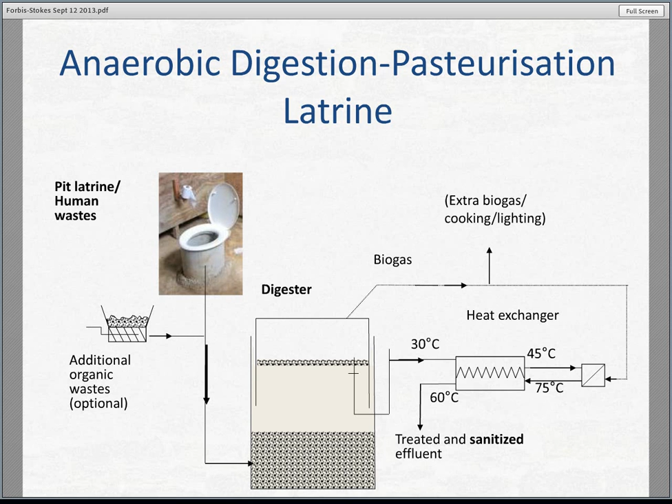What comes out after the final pass through the heat exchanger is an effluent that we hope has no pathogens. We also hope to produce extra biogas that you can use for cooking, lighting, or any other energy needs the home or community has. The system has no moving parts—it's all gravity flow, so it's very simple, and we hope to have very little maintenance for the system.

So the objectives for our project: we started off wanting to prove the concept. We did over a year of operation in our lab here at Duke. We wanted to see if the digester could operate well under high strength conditions of just urine and feces, and make sure that our heating system would remove pathogens.

We did test for pathogens with E. coli and used simulant urine and feces for the digester. Since March, we've had very steady conditions and are pleased with our process.

So we have moved into the pilot study phase of the project. We started building in Kenya in May, working in Eldoret with the University of Eldoret. We built 3 systems, each one serving approximately 25 people. That project's ongoing, and we'll continue monitoring digester operation as well as the heating system like we did in our lab at Duke. For the future, we want to assess strengths and weaknesses of the project that we can improve on and continue to use, and see about feasibility for scale-up.

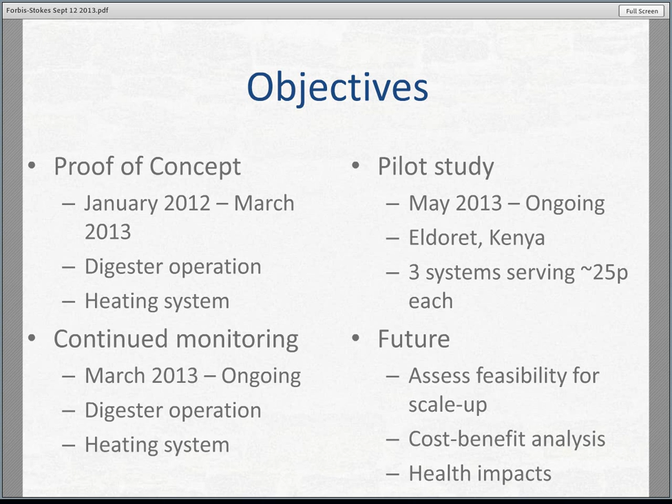Also associated cost-benefit analysis: the extra biogas has a pretty significant value in the community in Kenya, since burning fuels are very expensive. And the final effluent is high in nitrogen, which makes it a very valuable fertilizer, which is pretty expensive for the local residents. We also, in future studies, want to monitor some health impacts from our system.

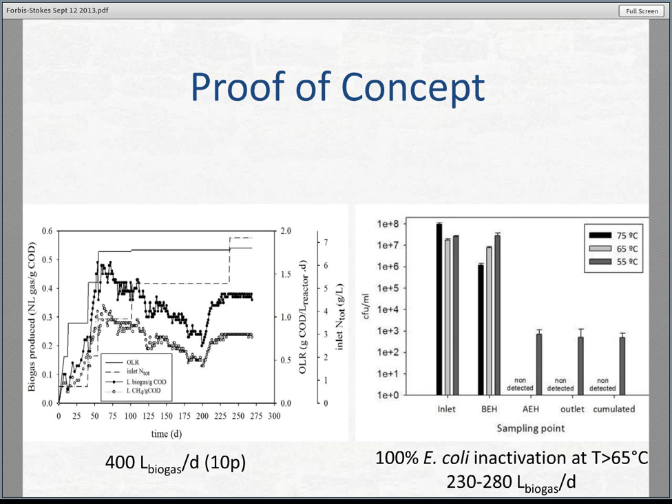On the right side, using that same system design, here's some results from our heating. Operating our heating tank at temperatures greater than 65 Celsius, we had 100% E. coli inactivation. To operate the heating tank at this level, we needed about 230 to 280 liters of biogas per day. So we found that we will have, or we expect to have, excess biogas from the digester.

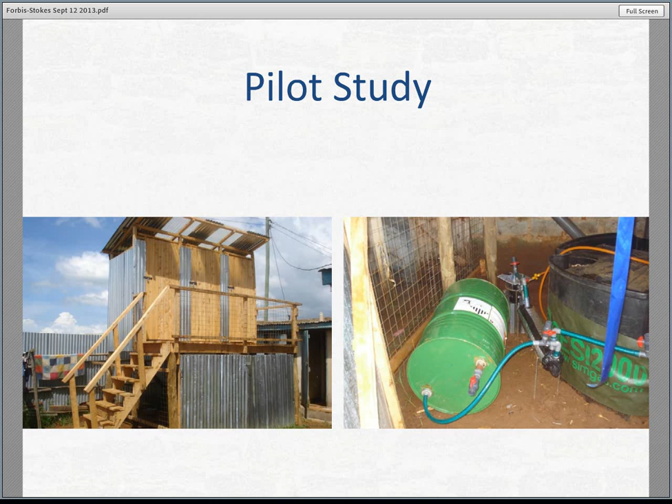Welcome, Dorothy. I had a little question about the three systems for 25 persons per system. Is that one toilet, or is it several toilets for each system? So each toilet or each system is what you saw in that final picture with the 3 latrines above connected to the digester system below. This left picture, we built 3 of those. The way the residences are set up in this community, you have kind of an 1/8 of an acre plot with about 25 residents on each, so we built this system on that plot, and all the residents of that plot share that one system. There are 3 different plots where we built these.

Just one other question: water content is so important in biogas production, and I'm just wondering how you managed to regulate that.

In the lab, we haven't regulated per se. The only thing coming into the digester is our simulant urine and simulant feces, based on what we'd expect: about 1 liter per person per day of urine, and 400 grams of feces per day per person. That's all that has come into the digester.

We did do a phased up-loading period where we had a higher concentration of water versus feces and urine. But once we got to about day 75, we stopped doing that and have been operating with only urine and feces coming in.

Any questions from the group that's connected? Okay, I guess we'll... Aaron, sorry?

I was going to ask Aaron, how fast is the digestion? The one in the lab we designed for a 40-day retention time.

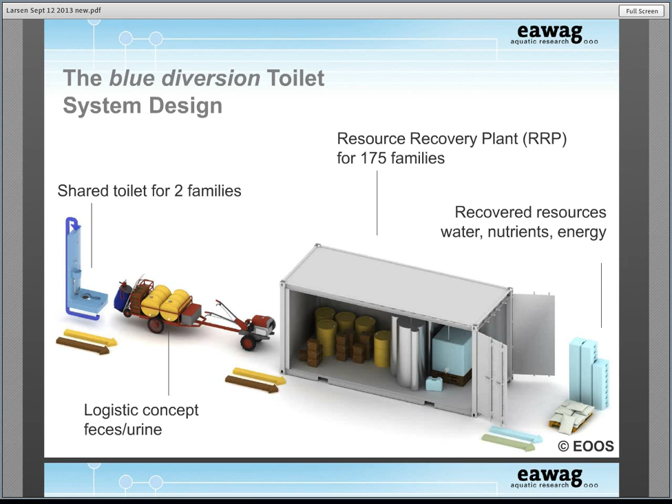We chose to develop a shared toilet for 2 families and recover the resources at a larger scale, for about 175 families. The toilet is a urine diverting dry toilet. Because of this change of scale, we need a logistic concept for transporting dry feces and undiluted urine to the resource recovery plants.

From the urine, fertilizer is recovered, at the expense of energy generated from feces. In this presentation, I'll concentrate on the toilet.

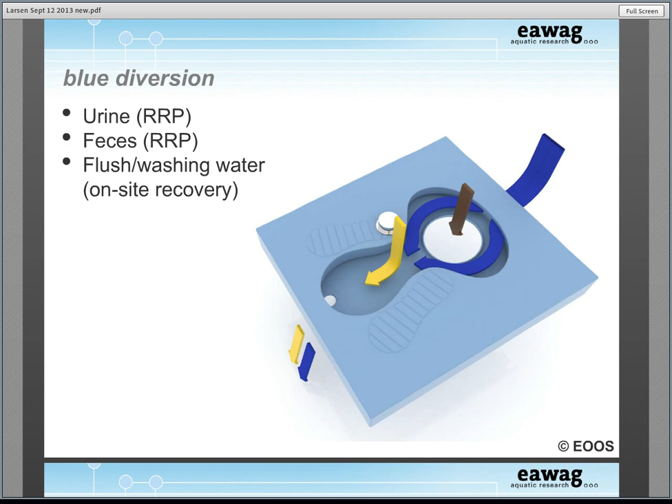It's a urine diverting dry toilet as we know them, but in order to increase hygiene and comfort, this toilet can be flushed, and urine and the flush water are not mixed — they're separated by a technical device which the user cannot see. The water can also be used for hand washing and anal cleansing. It's recovered on site.

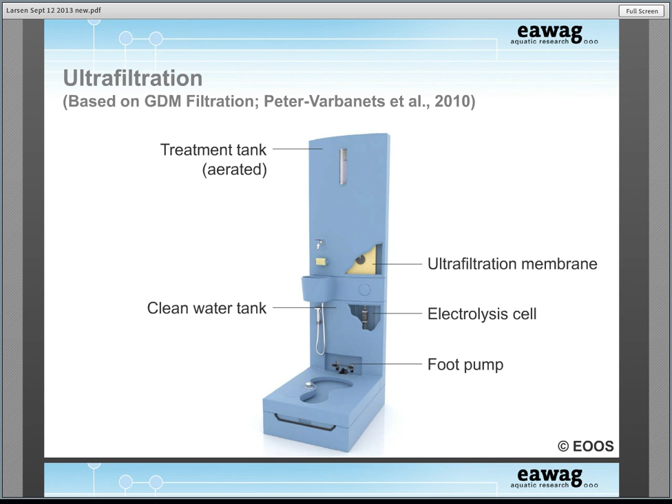In the water wall of the toilet there's an ultrafiltration treatment tank, but it functions exclusively by gravity. It's based on the gravity-driven membrane filtration developed at EAWAG for drinking water production. The polluted water is pumped up with a foot pump by the user, and the ultrafiltration membrane is kept open by higher organisms grazing on it, so one doesn't have to maintain it.

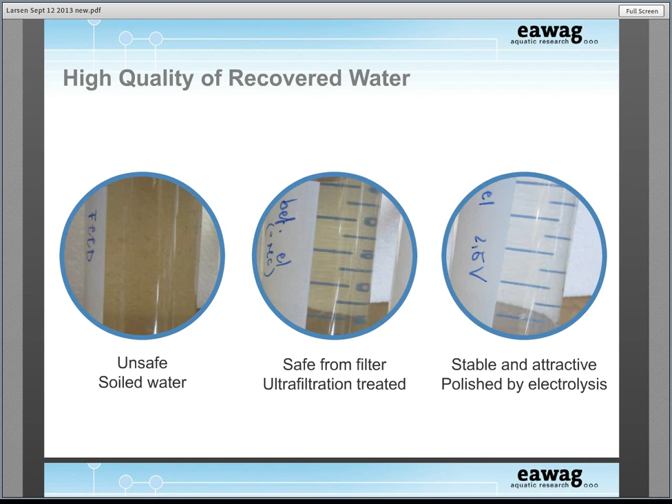The water comes out safe from the ultrafiltration membrane — without bacteria, without virus — but as you see, the water is slightly soiled, slightly colored. We remove this color with electrolysis, and at the same time remove traces of organic matter and produce chlorine for disinfection.

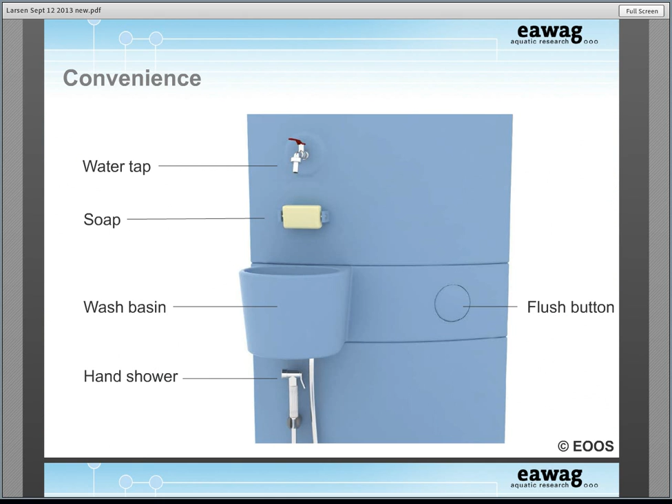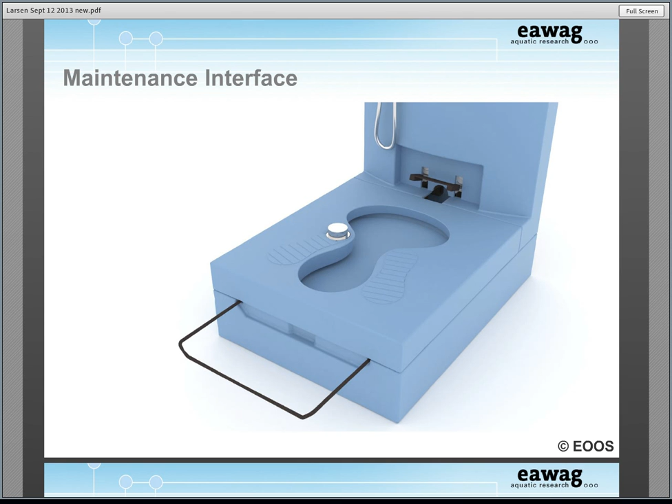The toilet was designed by Harald Gründl and his collaborators at EOOS, but very early in the process we went to Uganda, to Kampala, and talked to potential users about whether they liked the design language. They liked that, and they also liked the convenience — the water tap, etc. Especially the washers liked the hand shower, and they liked the flush button.

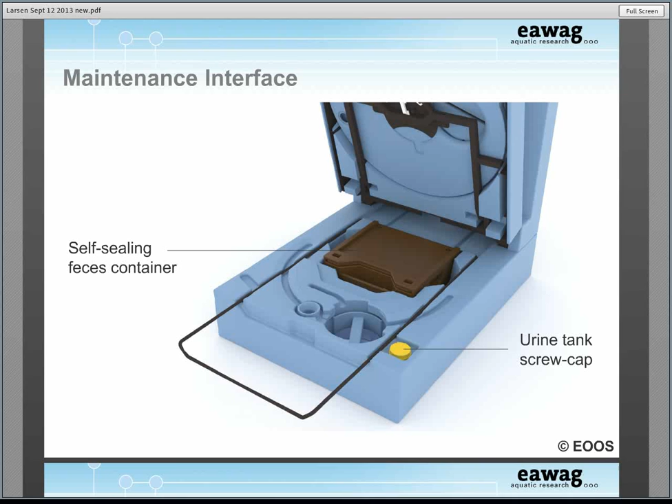The maintenance interface is very important in order to ensure that the people collecting the urine and feces twice a week will not get sick.

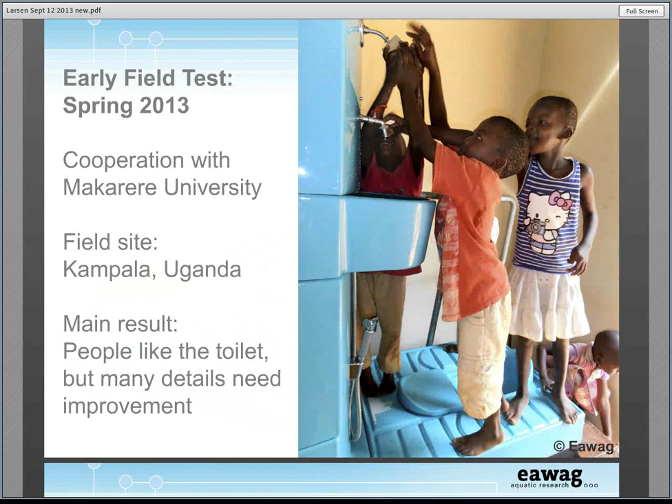This toilet can only be opened if you pull this rim. When you pull the rim, the feces container is sealed automatically, and the urine can be pumped from the bottom of this container.

The container can also be removed by the people themselves if, for instance, the collecting service breaks down.

We tested this very early in the process, in spring 2013, in cooperation with Makerere University, with a field site in Uganda. The main results were that people liked the toilet, but of course there are a lot of details which need improvement.

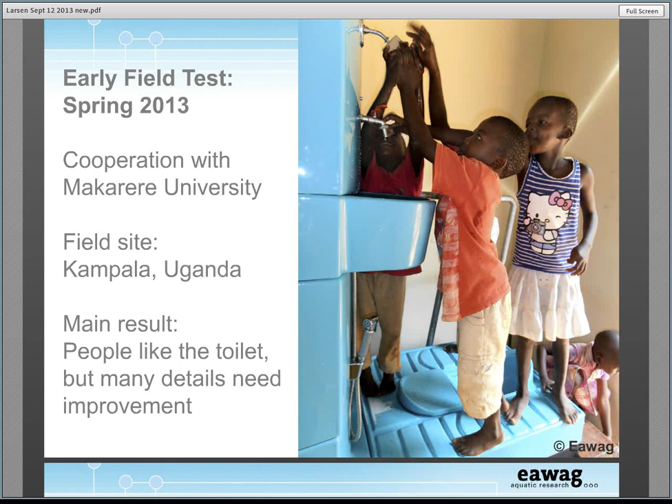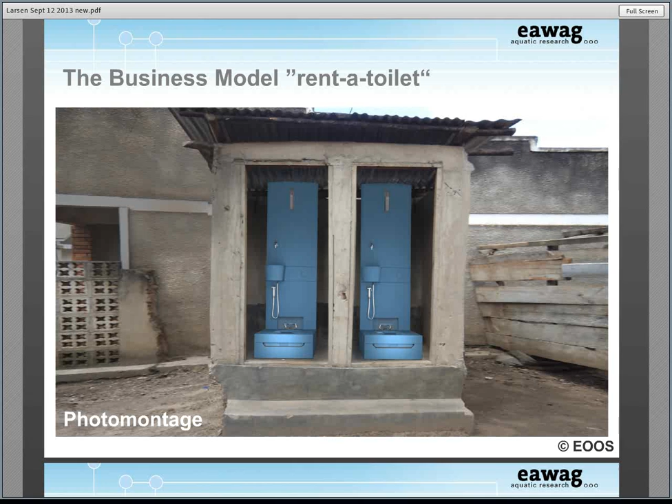You see it from this picture — it's difficult for the kids to reach the soap, etc. You also see that the pan looks slightly different from what you've seen until now. People open the feces lid with their foot, and afterward, when they use the shower or flush, this lid closes automatically and only the front part is flushed. The advantage is that the toilet can be used by washers and wipers alike.

The business model is set up as a rent-a-toilet model because nobody will be able to buy these toilets. You also see they can be placed in any superstructure you will find.

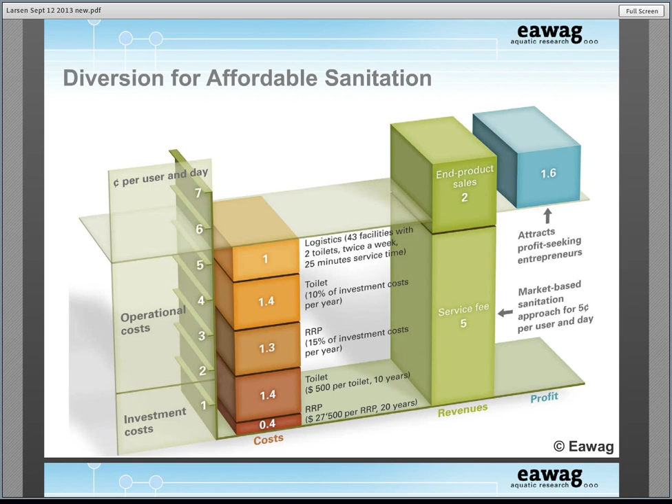Next, please. We set up a business case for Uganda to see whether it's realistic that this can actually be done for 5 cents per person and day as required. Obviously this is a challenge, but because we divert urine and feces, we actually think it's possible.

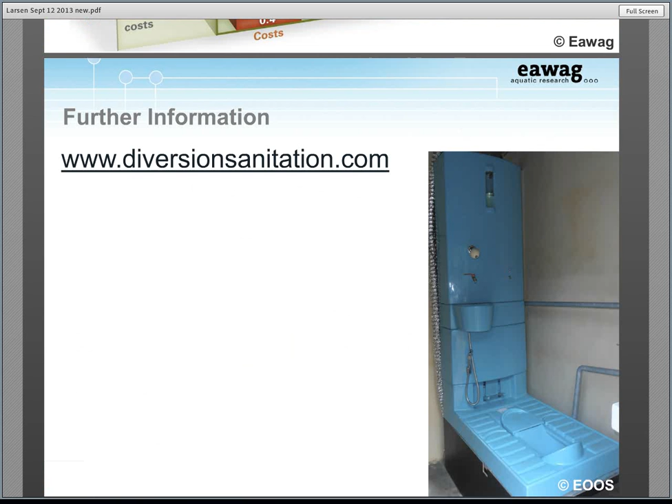We have some income from selling the nutrients, the fertilizer, and it's important that there's also a profit for the entrepreneur who will run this business, else nothing will happen. You may also see that our operational cost is relatively high. We think it's necessary that we have funding for local maintenance.

There is a lot more information on our homepage. That's all from my side.

Okay, thank you very much, Tove. I think that was very clear. I did have one little technical question about the membrane you're using for filtering this reused water. Is that a very expensive unit, and what is it made out of?

Yeah, these are the normal polymeric membranes which you would also use for drinking water production in a normal drinking water plant in Europe. They used to be expensive, but the prices have been falling a lot in the last time.

We think that about 20 to 25% of the construction cost of this toilet will be for the membrane, but it will last for 10 years. The important thing is that we do not have to maintain it. It will not have to be cleaned. It's included, of course, in our business case.

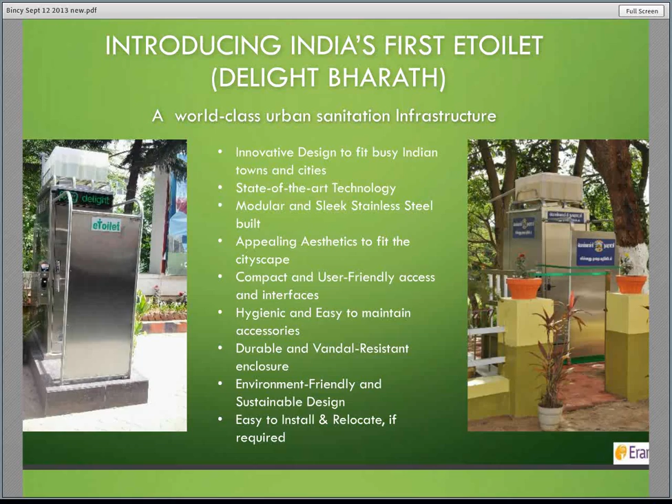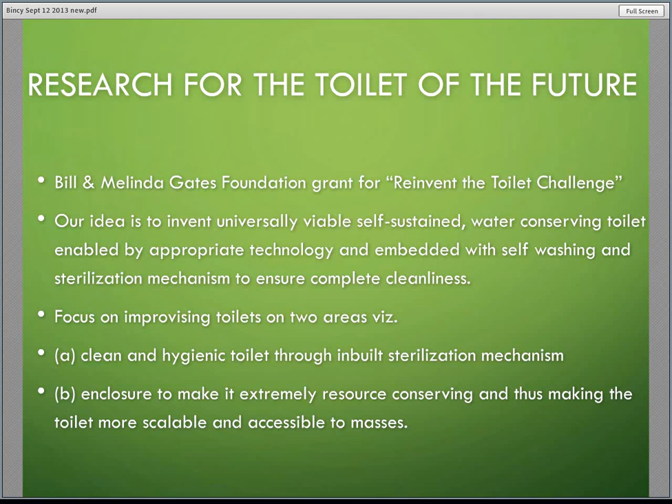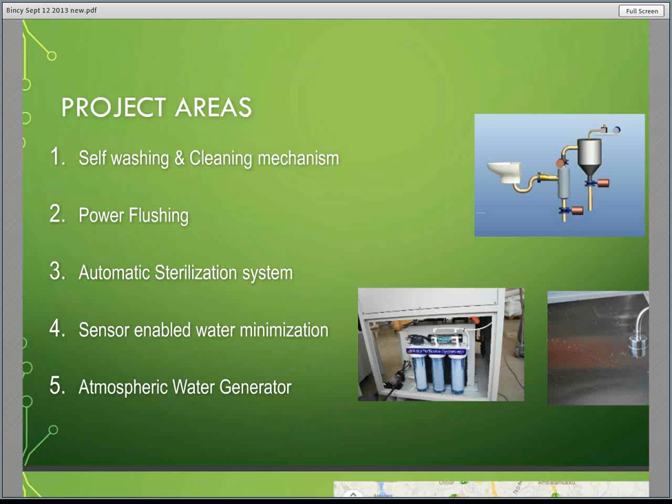Coming to the RTTC project we have undertaken, we had an enabled monitoring mechanism, a control system, where you can see the health of each and every toilet installed across 100 sites.

Another image of it. Thank you, Bincy, that's all. The sound wasn't very good, but just a few questions before I give it to others.

Could you tell us how the self-sterilization works? The self-washing and self-sterilization, how does it work? And two...

It works on a sensor-based system. You have a sensor wherein it understands that a user has entered the toilet, and after his usage, even if he doesn't flush, the toilet flushes all by itself upon his exit. For urinating, it's less than 3 minutes, so the flushing of water will be less than 1 or 2 liters, depending on that. If it's more than 3 minutes, the flushing will be different. We have introduced this, part of it, in some of our existing toilets on a trial basis, completed by the end of our grant period.

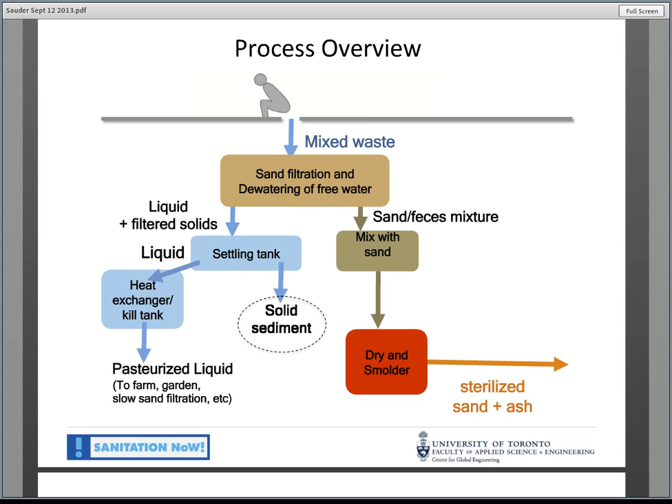Is that pyrolysis? Is that what pyrolysis is? No, it's not pyrolysis. If you go on to the next slide.

The smoldering front, so smoldering is just a combustion process, but the combustion takes place at the surface of the solid fuel rather than the gas phase. So we don't have an open flame. The temperatures are also lower than open flame reactions.

So the smoldering front moves up through the column, and as it does so the temperature profile in the column changes. The temperature at the smoldering front is where you have the highest temperature. Ahead of the smoldering front, the temperature also starts to heat up, and we get some pyrolysis of the fuel because of the higher temperatures already being reached. The black mixture in the middle of the spoon is what the fuel looks like at the combustion, at the smoldering front, and the pyrolysis zone ahead of it.

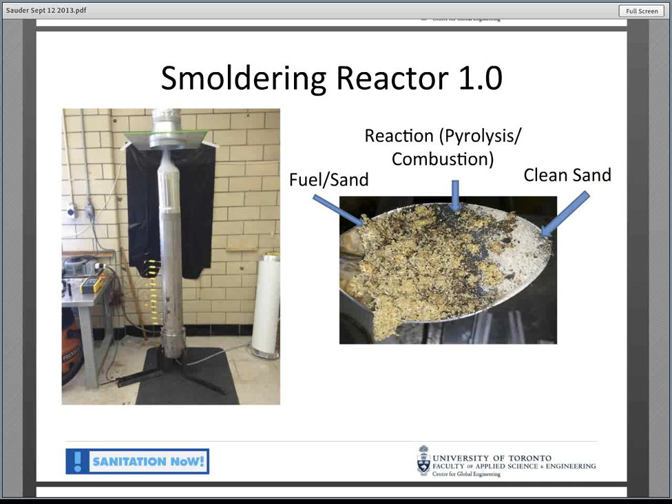At the end of the reaction, what we end up with is clean sand, shown at the right tip of the spoon. If you look at that spoon and turn it vertically, turn it 90 degrees clockwise, the top of the column would have the fuel and the sand, the middle where the smoldering front is would have that black material, and the bottom, after the smoldering front has moved through, you end up with clean sand.

The amount of liquid matters quite a bit. The more liquid we have, the more heat is needed to pasteurize it. Maybe Aaron, you and I can compare notes later. We're working on a 10-person scale process, so assuming a single family scale, and assuming urine output from the family as well as anal wash water.

We've done studies in Bangladesh to determine the amount of water people use for anal wash and personal wash. For 10 people, the amount of urine plus wash water, we started the process this year assuming we're going to need 55 liters - we're going to have to process 55 liters a day. And that's actually quite a lot in terms of heat requirement. So we've worked now to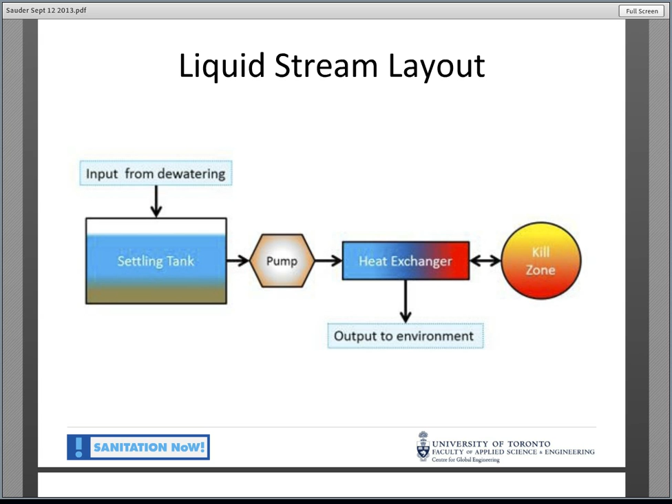introduce hoses, and hoses with aerators as well. With hoses and aerators and nozzles, the amount of water people use has been reduced by a lot. We've tested this with over 100 people, and now we're very comfortable thinking we only need to process about 30 liters of water a day. We can provide all the energy we need from smoldering and drying for that amount of water. Next slide please.

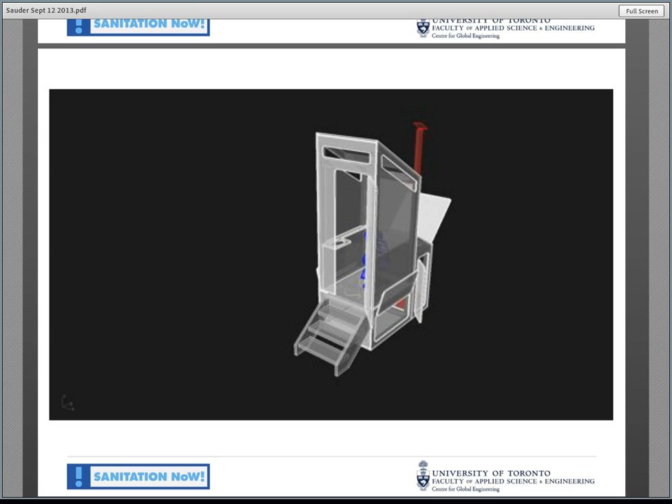The reason for the sand is that for the smoldering process - think of smoldering as something like a barbecue, or a cigarette, a burning cigarette is a smoldering process. So we have to get air to the surface of the solid fuel. If we only use feces as a soft material, it would compress and air would not contact the fuel very well. By mixing it with sand, the harder consistency of the sand provides a porous structure in the bed, which allows air to get through.

And then we take advantage of the sand as our filtration medium as well. So, okay, thank you.

I have a question with regard to nitrogen. Have you been looking at the fate of nitrogen in that heated process, the kill tank? We have not done that yet. Right now we're mainly focused on getting enough energy there so that we can pasteurize it.